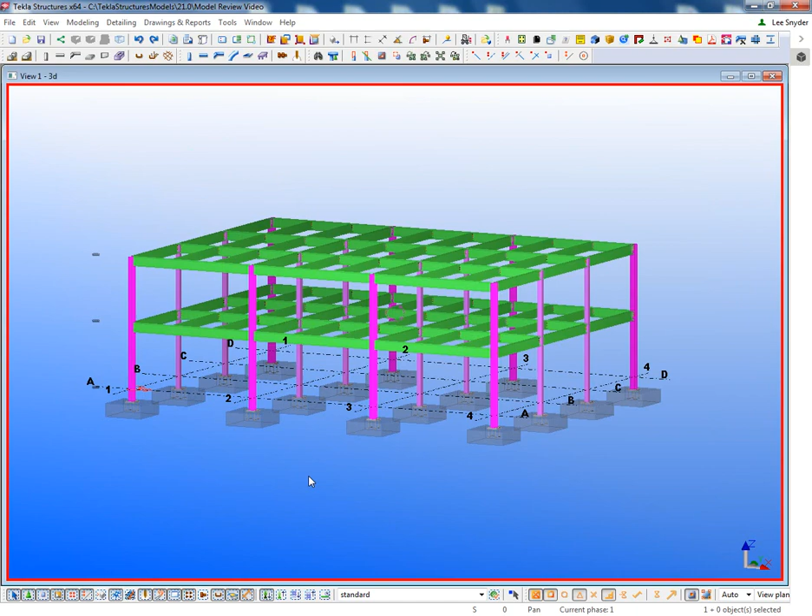I've created my model here, just a basic one here. I've produced the drawings, and I want to send this over to the engineer who's using the project viewer license within Tekla to come in and start reviewing this and status the model. So a couple things that I can do, I'm just working in my normal steel detailing license. I have all of my normal filters and everything like that.

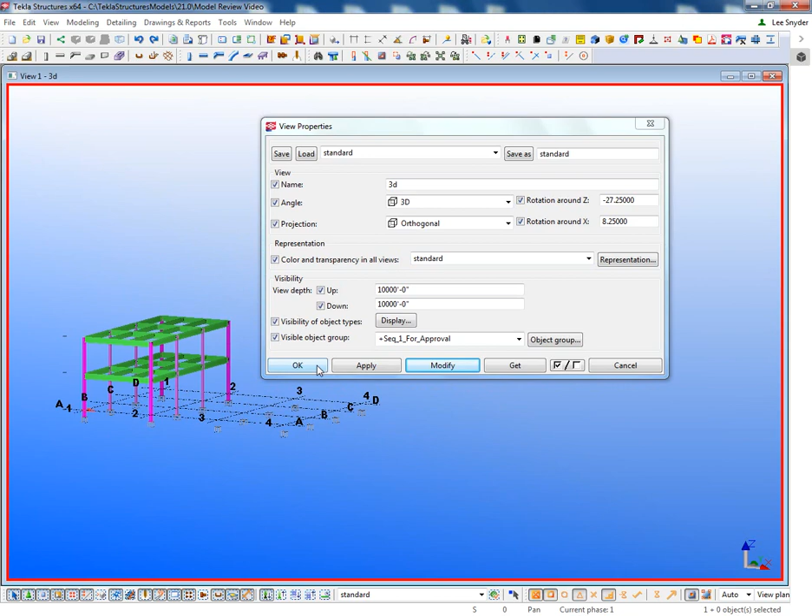And if I want, what I can do is I can come in and just real quickly filter out specific information for the engineer that I want them to review. So I could create like a sequence 1 for approval filter. Just go in here, hit modify, and then this would be the information that they would see when I save the model. So I could just come in here and save the model that particular way, and then to transfer

this, all I need to do is just come in here and just zip up this folder. So my project is called the model review video. I could just come back here, right click on here and then zip this up or send to compressed file, however you want to do that, and then just transfer that over to the engineer so that they have all of my specific settings and everything like that.

They can open it up, begin to do the review, and then to bring all of their status information back into the model, they're just going to send me just a few files that I can import into my current project, which is a workflow that we'll show here in a minute. So here I can just come in and zip this up, give this whatever name that I want, send that over to the engineer. In this case, I'm going to send it over to Dave, and he's going to begin the review for us.

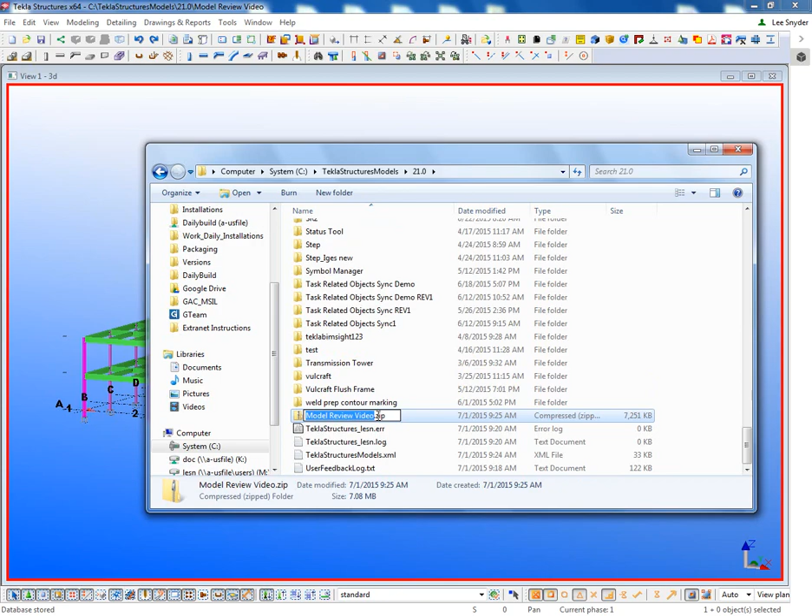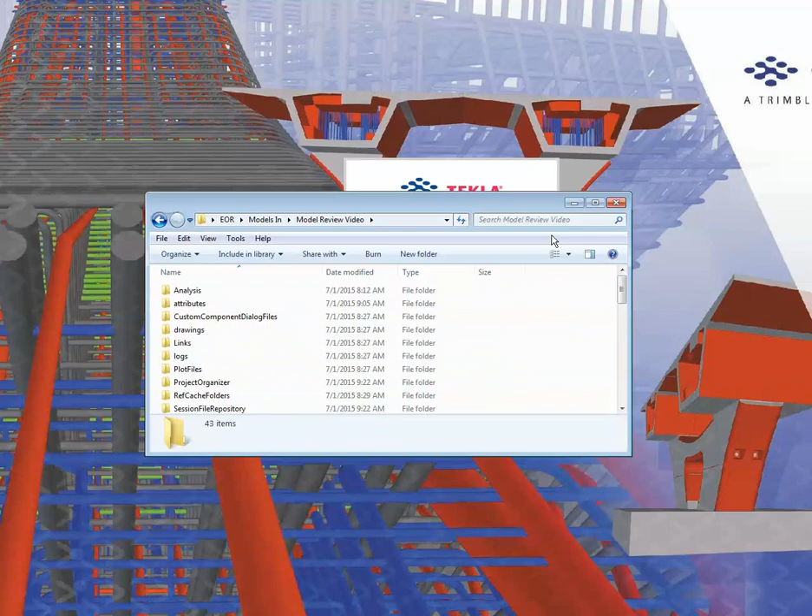Okay, so now that I've gotten Lee's model, whether this is via email, via Dropbox, any kind of cloud server, it's up to you. Good workflow ideas there. So this is the zip file that the fabricator detailer sent over to me. So basically just unzip it just like any other zip file and place it here. So again, if we open up this file, this is the actual Tekla Structures model folder here with all that information as well.

All right, so now I'm going to come in and just open up Tekla version 21, and you'll see here, so the roles now, we've added this reviewer role. This is what Lee was talking about, and this is geared up here to work with our new project viewer configuration as well. So once I have these set up, I'm just going to open up Tekla. Now I'm just going to browse to that model.

But again, now you see, when I open up this model, this is that filter that Lee had set before he sent it over. So again, it's going to make it nice and easy now for the approver team to come through and see exactly what it is that we're looking at on this submittal. All right, now real quick, just some of the things that we did here, just to explain what this reviewer role really is about.

One of the big things that we did here, if we just double click on a part, is you'll notice here that all the user defined attributes in the reviewer role are really stripped out, so that the only thing that you can actually modify now is the review status information. All right. So as you can see in here, it's broken down. We have different submittals that we can status per part.

So each part is set up out of the box to be able to be resubmitted twice, so 3 submittals total. But again, this is great for the reviewer. You can't accidentally override some of the fabrication, shipping, preliminary mark, user-defined attributes that a lot of fabricators and detailers are going to use throughout their workflow process.

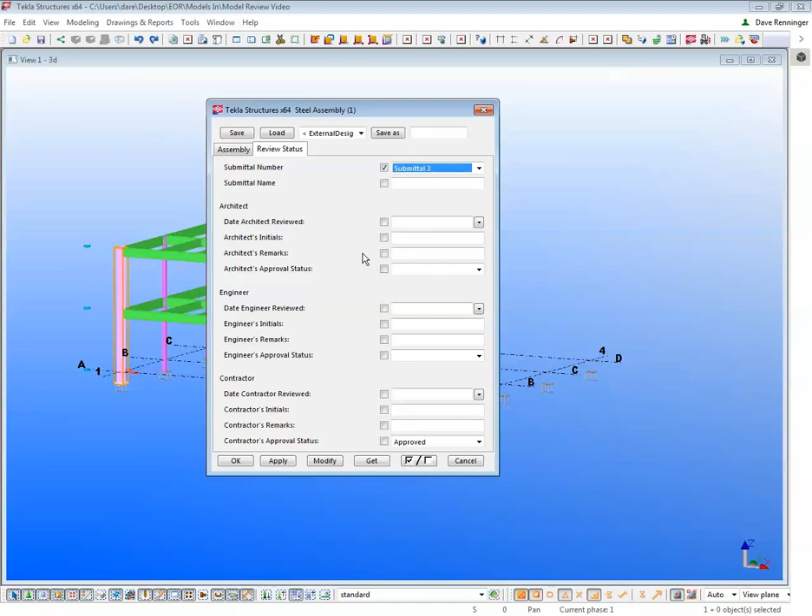So again, all you can actually status now is the review information. Same thing here. So the filters now, we have some select filters that really just apply here to the approval process - what are these statuses by the different review parties, as well as object filters as well.

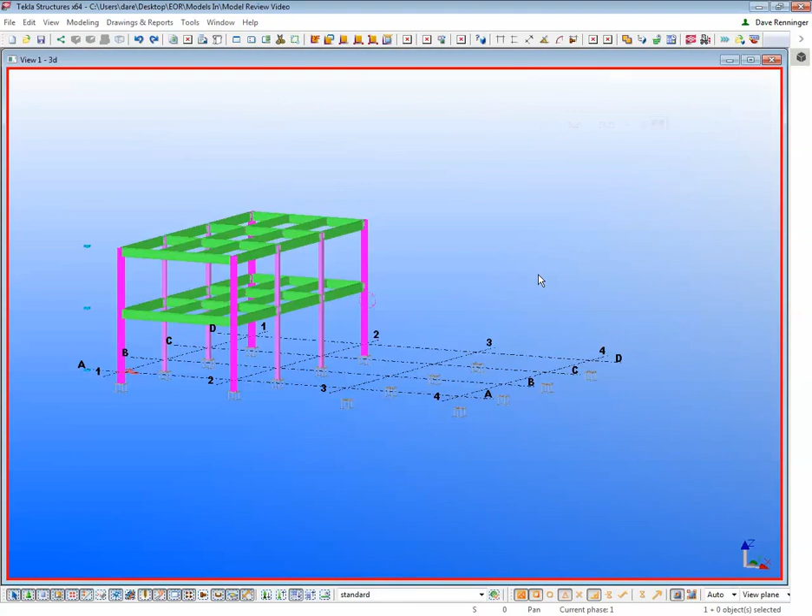All right, so when I come in now to start reviewing, one of the easiest things that we'll start with is probably come down here and enable the Select Assemblies button. This way now I can come in, I can just double click if I want to get any kind of assembly properties, just like we showed before.

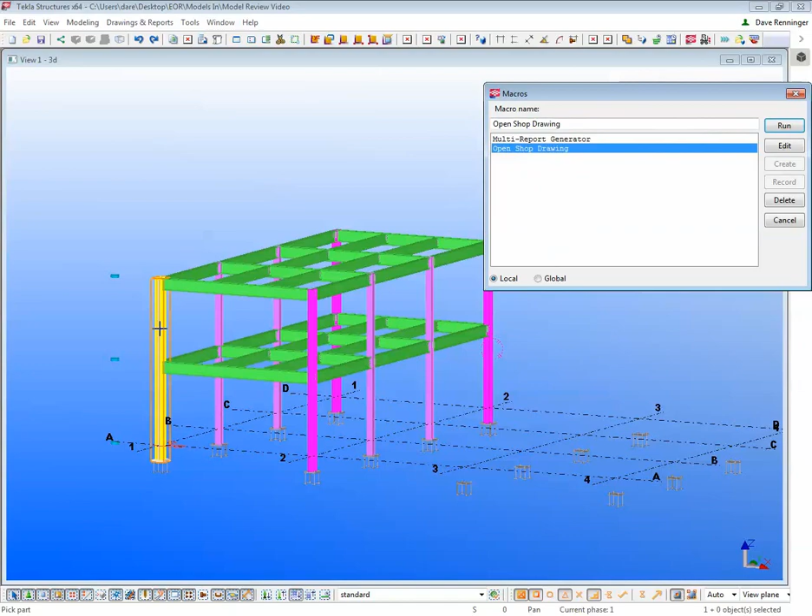What's also good is we can come up here to our macros and use the Open Shop Drawing macro. You'll notice here that the macros list has also been stripped down for this reviewer role. So I'm just going to come in here to my macros, Open Shop Drawing, hit run, and then it's going to ask me to pick an object. So I'll just pick this column assembly here, and now it's going to come through and open up the actual shop drawing.

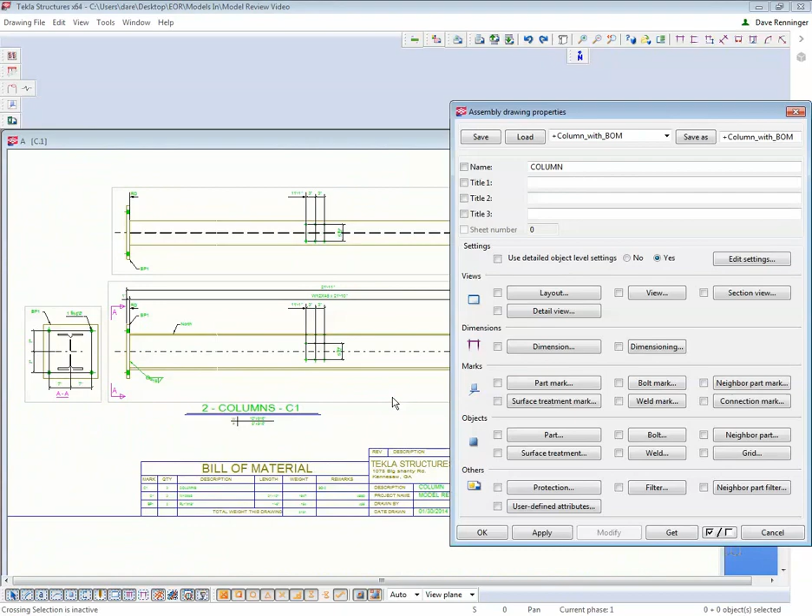So here I can come through and see everything here about the object. I can come down and check out the bill of material for any objects I might have. So now when it comes to actually reviewing this, I can also come through and status this drawing as well. So if I double click on the drawing, if I come in here to the user defined attributes, you'll notice that this drawing as well has this same information.

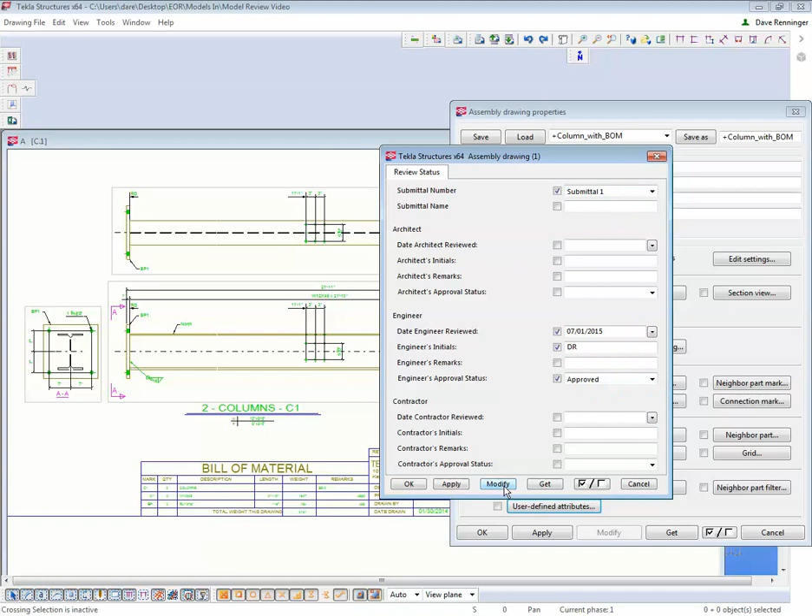So again, we can come in here, submittal 1. I'm playing the role of the architect, the engineer today. I can come in here and just put in my initials, remarks. If there's any kind of remarks, depending on what my approval status is, this one I'm just going to approve it - good enough here. So I can modify this. Now I've actually statused this drawing as well.

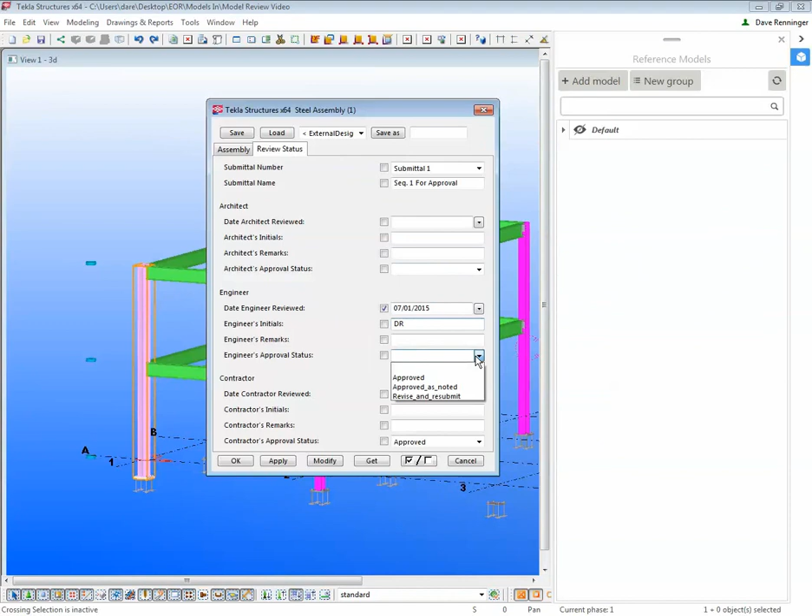Okay, so now again, once I've statused the drawing, I can also come back here into the model. So we'll close out of the drawing, we'll come back in here to C1. So we can status this as well on the actual model level as well. So again, we'll come through here, set up the date, put in my initials here and any kind of comments, approved. Modify here.

All right. So what's good then is what we can do is we can come in here to our object representation rules, and I can colorize the model here by my different statuses. So this is great - I can just come through here and just say, okay, let me colorize by the engineer status, modify now, and this is going to be a great tool to help me as well. So we can see anything that has not been reviewed yet is going to be real transparent, kind of harder to see, but obviously now whatever parts we do status, we're going to get the green, yellow, red colorization based off of whatever statuses we give it here in the model.

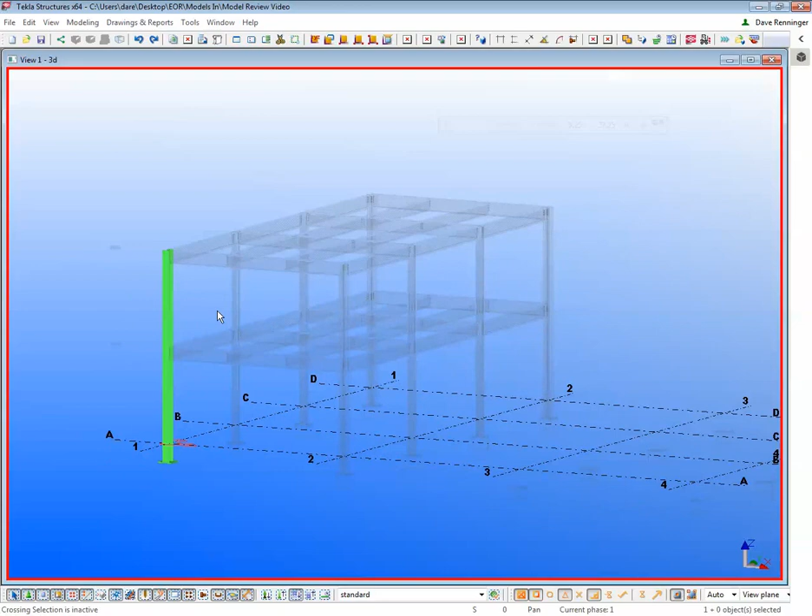Okay, so first assembly approved, easy enough to do. So let's go through now and actually add some comments and some markups to these assemblies. So again, we'll come back up here to our macros, let's open the shop drawings, let's open up a beam drawing here.

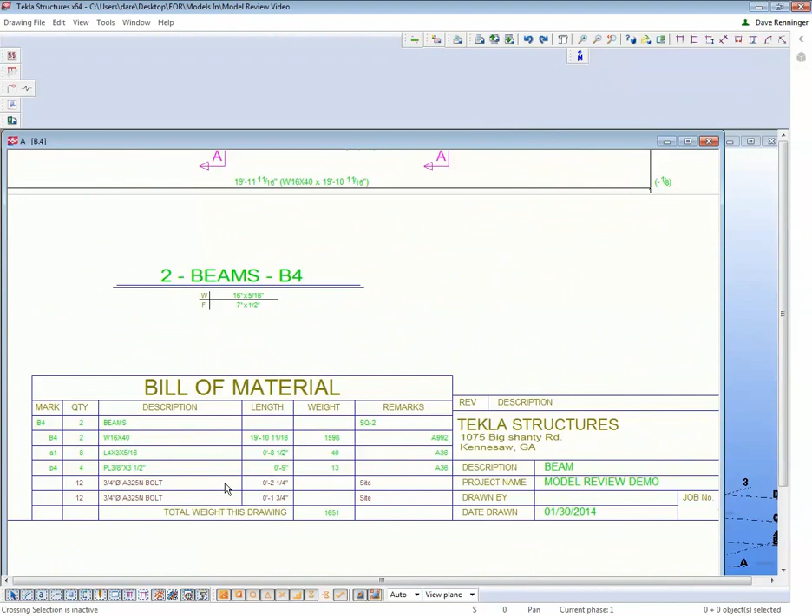All right, so maybe now in this beam drawing something needs to change, whether it's one of the welds or the shear plate. Okay, so this one will be a little bit different. Again, we have all the bill of material information here that we can use to easily dissect to get us started here. So I'm just going to come through here and I'm just going to add a note. Again, we'll go submittal 1, come in here for the date.

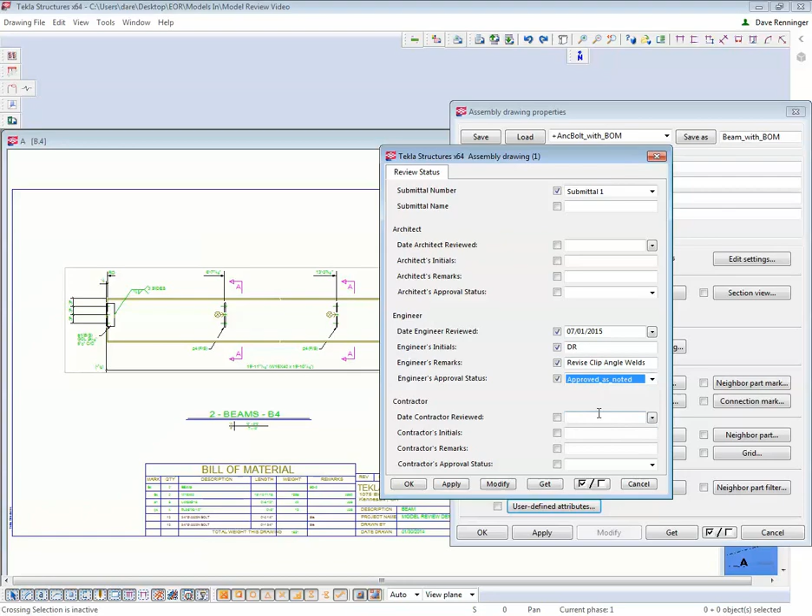I'm just going to say here, revise clip angle welds. So again, I can just add a comment in here, get a little bit of notes, and then this one will say approved as noted. And modify here to status the actual drawing. All right, then we come back out now to the model.

We'll do the same thing here. So again, we're going to come back into our assembly in the model and add this information as well. We can come through here and put the initials in. Now, whether or not we want to put the comments as well, we can put the comments in here, or we could also say see drawings. A lot of different options we have for this. So then again, we'll come in here, approved as noted, and modify.

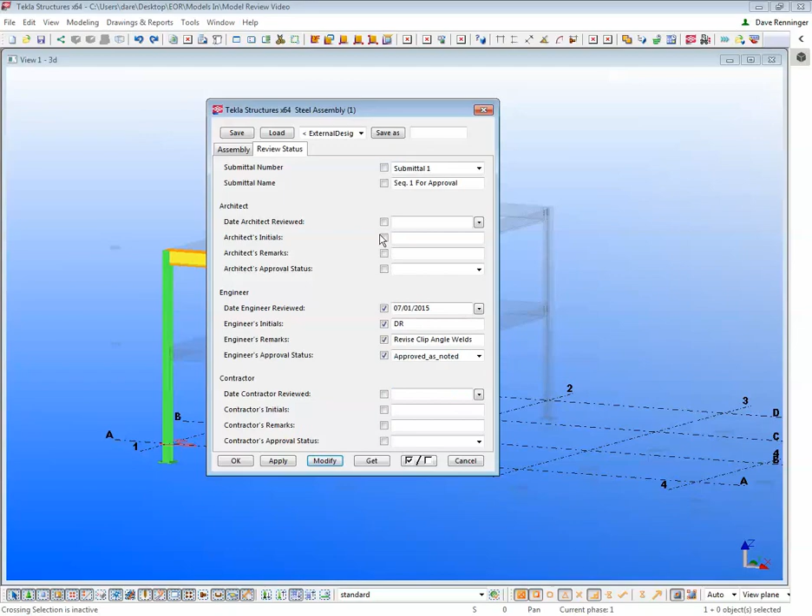So again, now you can see we have one assembly that's approved, shown as green. Another one that's approved as noted is now yellow. So again, we can start to approve this with notes as well.

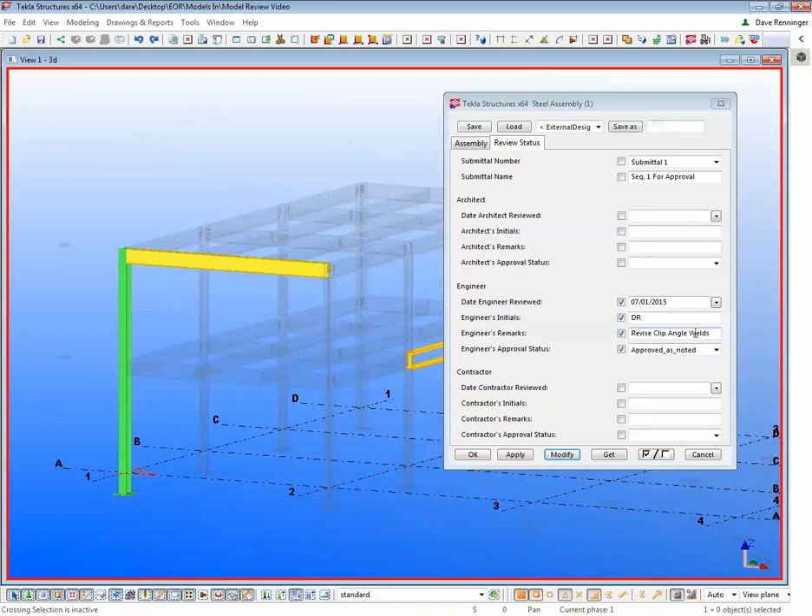Now, one other option we have when it comes to actually adding these comments to parts is that not only can we just apply a note here, revise the clip angle welds, but with this new reviewer role and workflow, we can actually status the individual objects that do need to be revised. This is going to eliminate a lot of the processing time going back to the fabricator and detailer as well. So what I mean by this is we could come in here, let's just pick another member here.

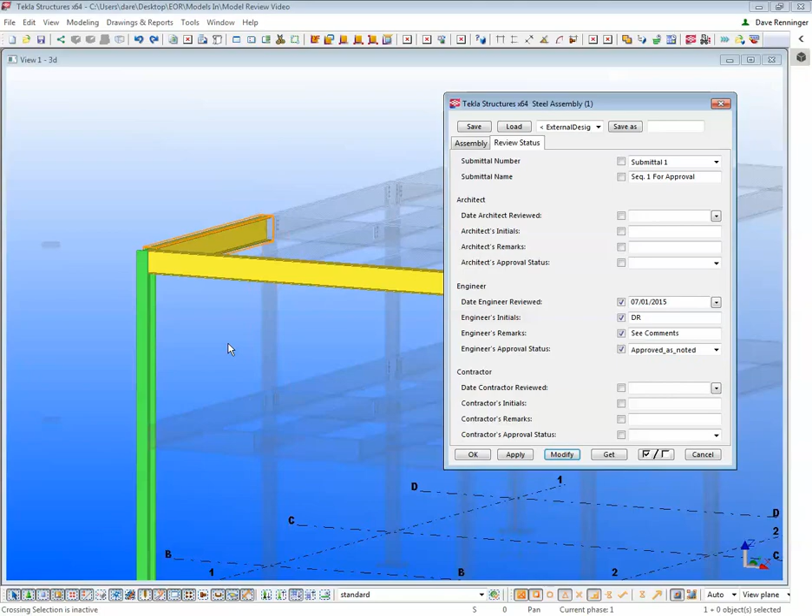If we come into the status inside here, we'll just fill in some basic information, put in the initials, and here we can say, see comments, or just see comments, and again, approved as noted. So say approved as noted, modify. But now what we can do is actually come in and modify some individual objects here.

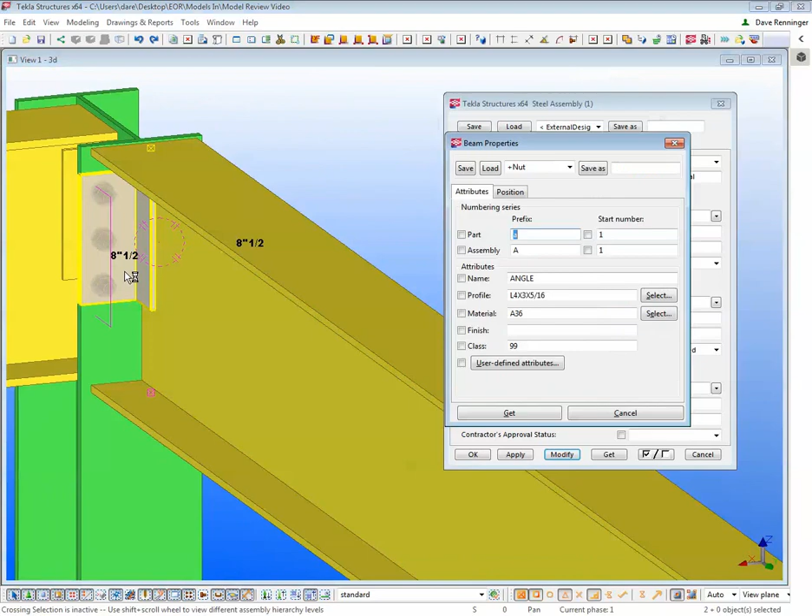So if I rotate my model around a little bit, instead of statusing the assembly, I can come down here and change my option to select objects in assemblies. These parts as well, I have the option to come through here. So if I want to revise these clip angles for any reason, I could just double click and modify these actual individual properties as well.

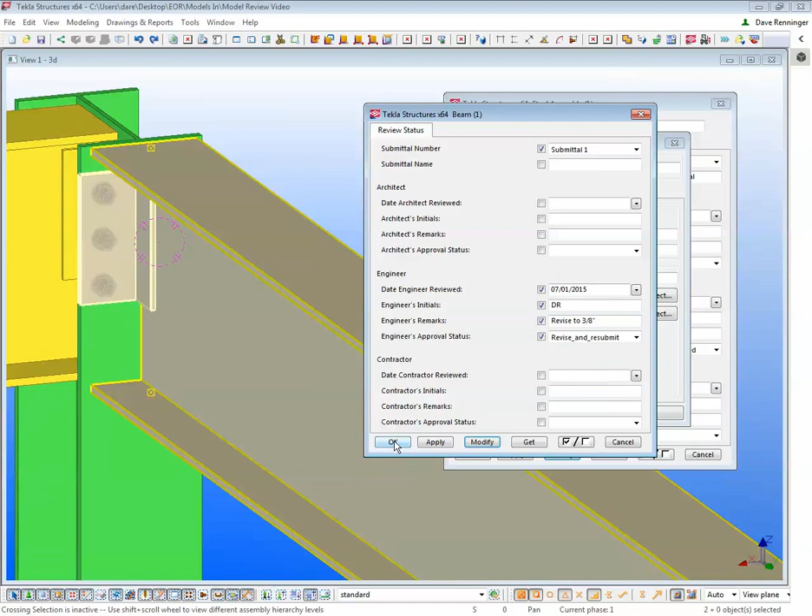So now, instead of just statusing that on the assembly level, I can put my information on here as well. We'll say here, revise to 3/8 inch. And now this one, just to get a little difference, I'm going to say this is to be revised and resubmit, and modify this as well. Now I've made a separate comment on the object level than I have on the assembly level. So easy enough, we can easily get this from the model as well.

This is where we just need to change one of our object representation rules. So you notice here right now, the one that I have set is based off the assembly, but we also have the engineer's approval status on the object level. So now when I modify this, I can see that those clip angles are actually red as well.

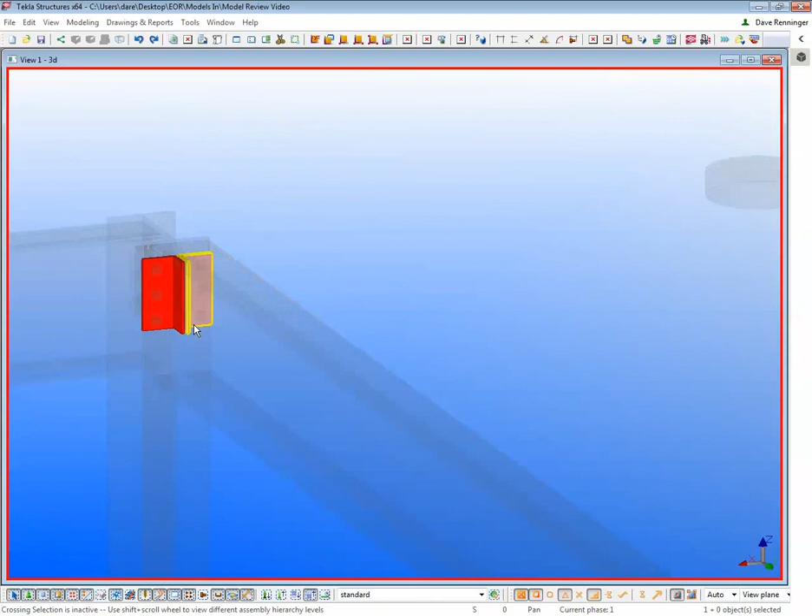So in this case, when you start doing this, it might actually be good to modify the main part of the assembly as approved as noted, and then come in and individually mark up the clip angles as well. So a lot of different options here as far as what level of detail you need to go to get your approval comments into the model.

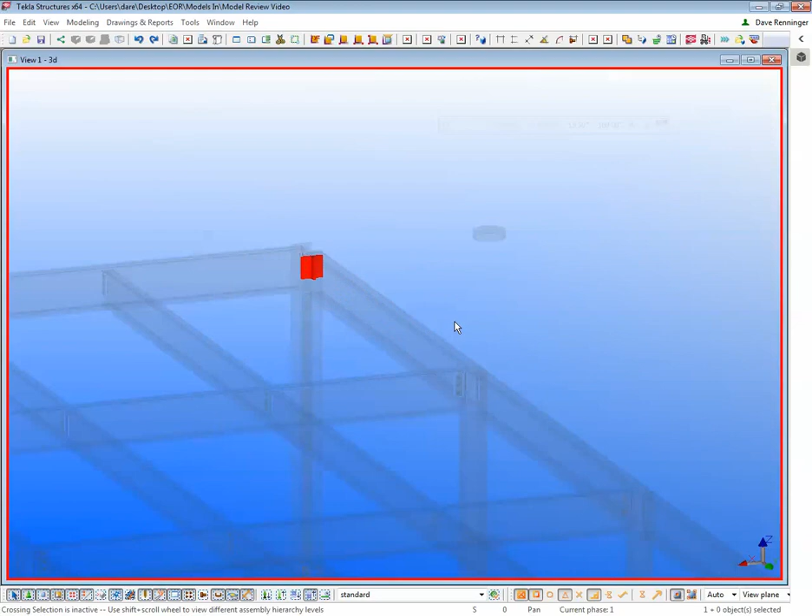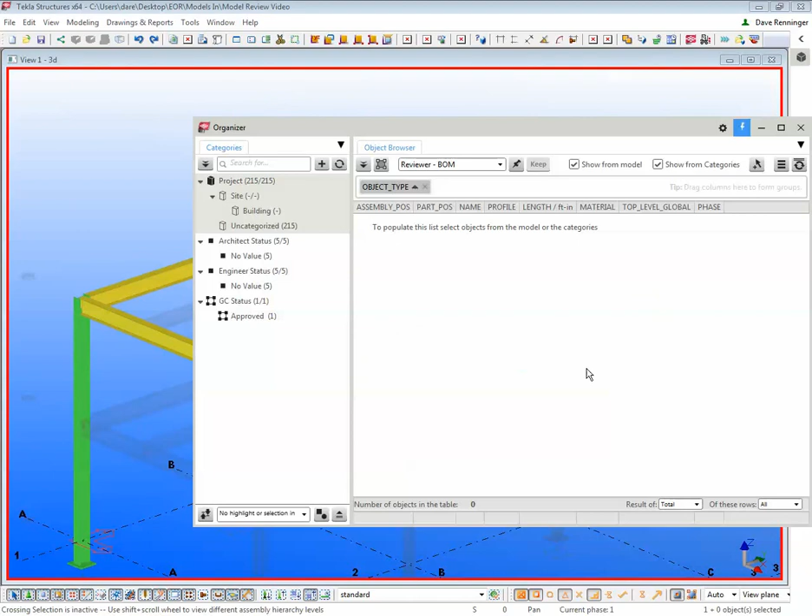All right. So one other way we have to nicely figure out exactly where we're at with the submittals, besides just this colorization, which is a nice quick easy way, we can also use the organizer to digest the approval information. So here I'm just going to load up the organizer, and you'll see we have some nice statuses already created here. I'm just going to synchronize with the model. Now I can come in and search for my engineer status, and you'll notice we already have some as approved, approved as noted, and no value as well.

So I can easily come through here on my engineer status. If I say here my reviewer status role, what I can do is I can easily just start to expand this information here as well.

And if we see the object type with no name to it, that's probably just a component or maybe the assembly. But now when I come through here as well, I can easily see now what the status is, if this has already been approved by the architect or the GC, and I can see their comments really easily on the fly here as well.

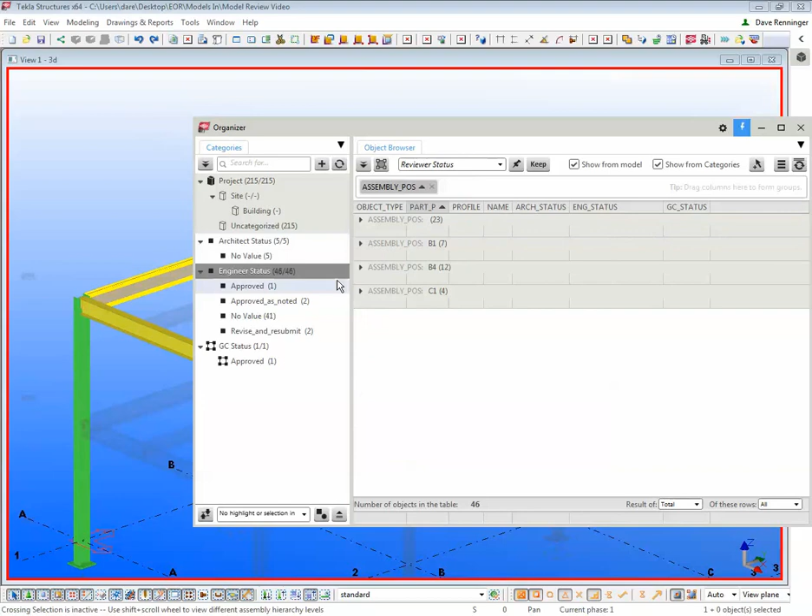So again, just by using some of the nice functionality here inside the organizer, I can also come up here and sort instead of by the object type, maybe sort by the assembly position. This is a great way now, if we come through, we can just expand this view out, and now we get a nice list broken down here by position.

So again, we can see here all the information. We're just sorting different ways we can sort this list as well. So you'll see now we have the name, the profile information here. Again, a real nice, easy way on the fly to come through and see exactly where this is at.

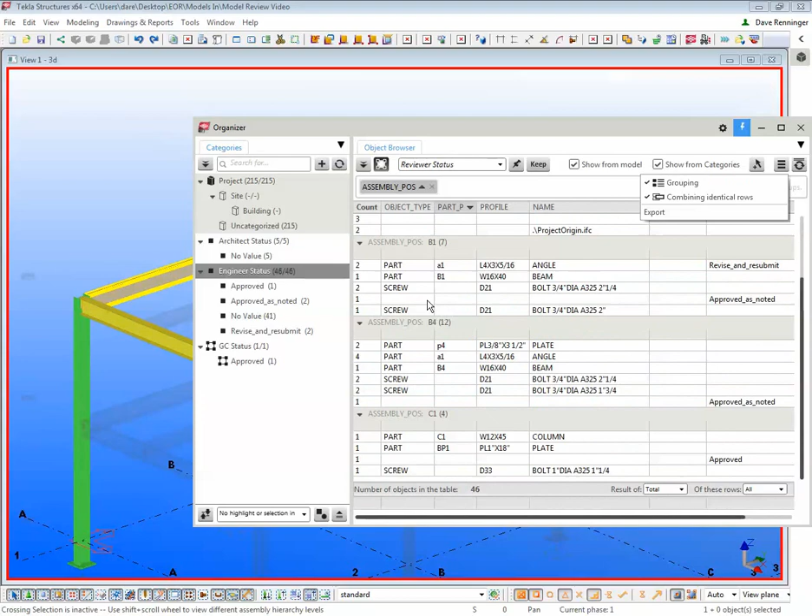So again, a lot of different information, how we can process the information here as well. And we can even combine these identical rows to give it more of a traditional bill of material style here. So again, just a lot of different options and tools to go through and really process all the information.

And again, if we see anything in this list that we need to put an update on, we can simply right click and say select in the model, and now it's going to go through and select those actual individual plates here in the model as well.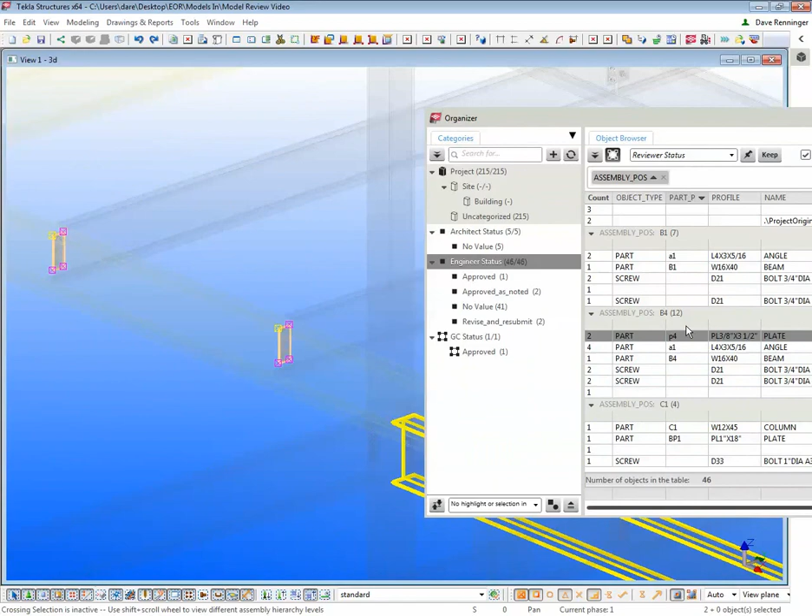So again, if we see something this way, easy enough to come through, find all these p4s, go through, and status them at one shot instead of maybe on 10 or 15 different assemblies.

All right. So now that I've gone through and added all my comments and statuses here in the model, now I need to get the information back to the fabricator and detailer.

Again, being that we have a direct copy of their production model, all of our identifiers, the GUIDs, the globally unique ID numbers, are exactly the same in my model that I'm reviewing as they were in the production model. So this allows us now to just create some basic reports to send back to the fabricator and detailer, where they can go back now and import those in the model.

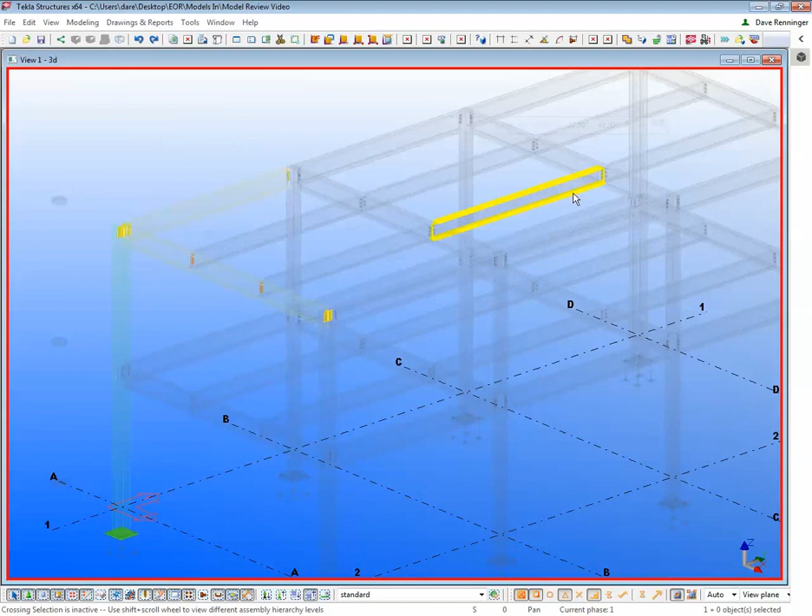All right, so we're going to show next. Again, if we come up here to our show macros, we also have the other macro that's in the reviewer role now, the multi-report generator. All right, so we just run this macro here.

And this is a great macro, just like the name says. We can create multiple reports at one time. And if you see here, we just have some different objects in here, different settings already localized. So whether it's for the architect for all your reports, if we want to break it down by assemblies, drawings, or objects, or also by the review team.

So if I come in here, since I'm playing the engineer now, if I load this, what this is going to do, if I scroll down here, it's going to create these three .csv reports, formatted to open up in Microsoft Excel. So as you can see, this will take all the comments that are on any of the assemblies in the model, the individual objects like those clip angles that I marked up, as well as any statuses on the drawings.

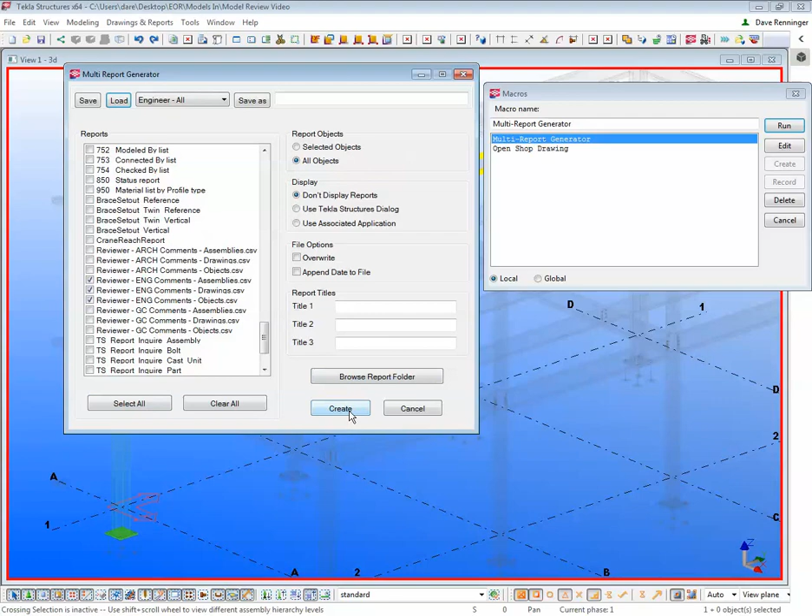Okay, so with these three checked, I can just say, which objects do I want to use? Is it based off of all the objects, or I can do by selected as well. So I'm just going to come through here and say, sure, base this off of all objects and create. Now the good thing is that you can format this based off of all objects because the reports themselves are formatted to only output if there is a status applied to these parts.

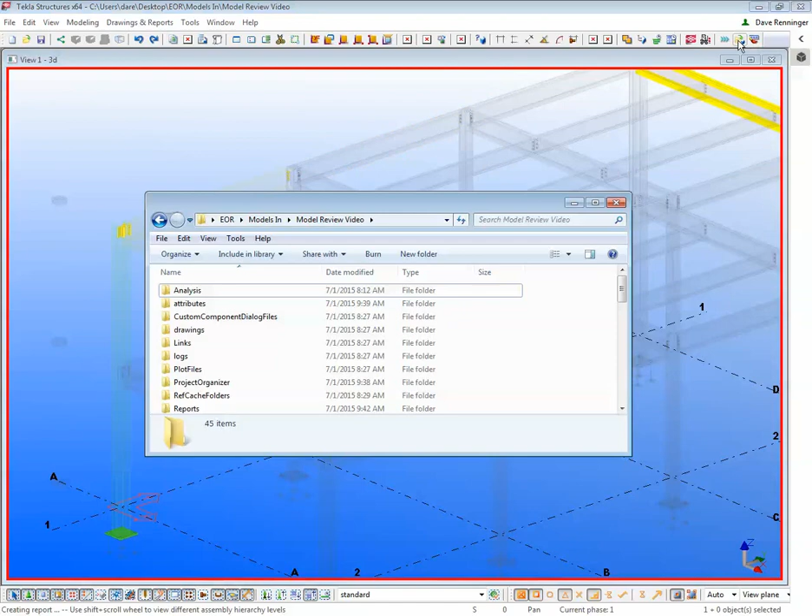So now that I've created these reports, all I have to do is simply come in here and open up the model folder. We'll see in here that in our reports folder, now we have these three reports. Okay, so again, I'm just going to select all these files.

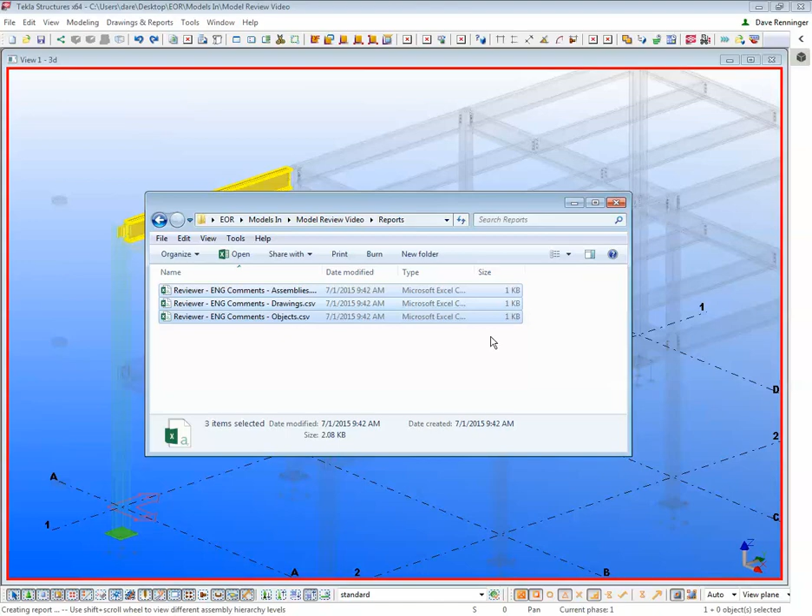Now again, whether I create them in a zip folder, email them back to the detailer, put them up on an FTP site or Dropbox, again, all those communications. But what's nice is, as you can see here, the file size is really going to be minimal what we're returning back as opposed to transferring an entire model both ways.

All right, so I've received the files back from Dave. He just copied them here onto this jump drive. So I'm just going to open this up. Here's these specific files. And then I can just copy them to the model folder or onto the desktop. Doesn't really matter. I'll just paste them here on my desktop.

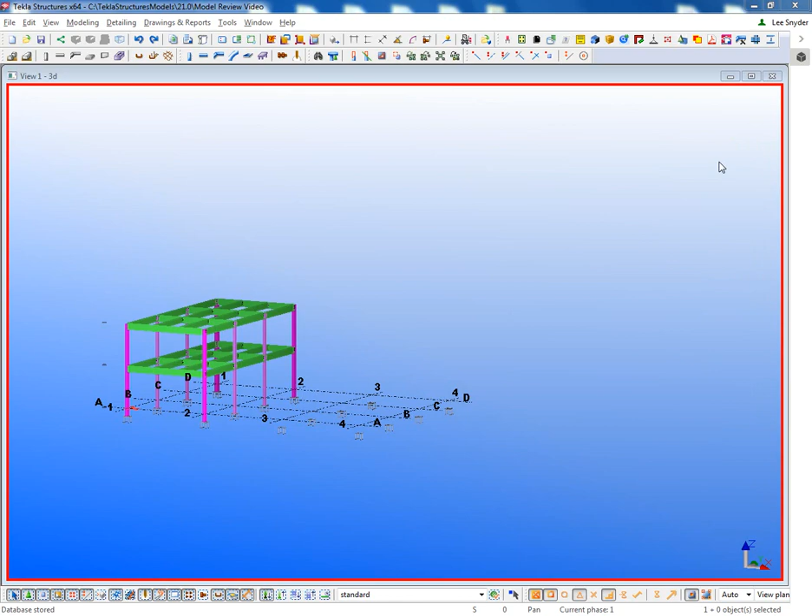And then what I can do with those is just come up here to File, Import, and then I'm going to come down to Attributes. I'm going to attribute import these files directly into the model. So here I'll just come here. First I'll just bring in the comments for the assemblies. Hit OK. I can set up any specific settings that I may want, but I'll just apply, hit create.

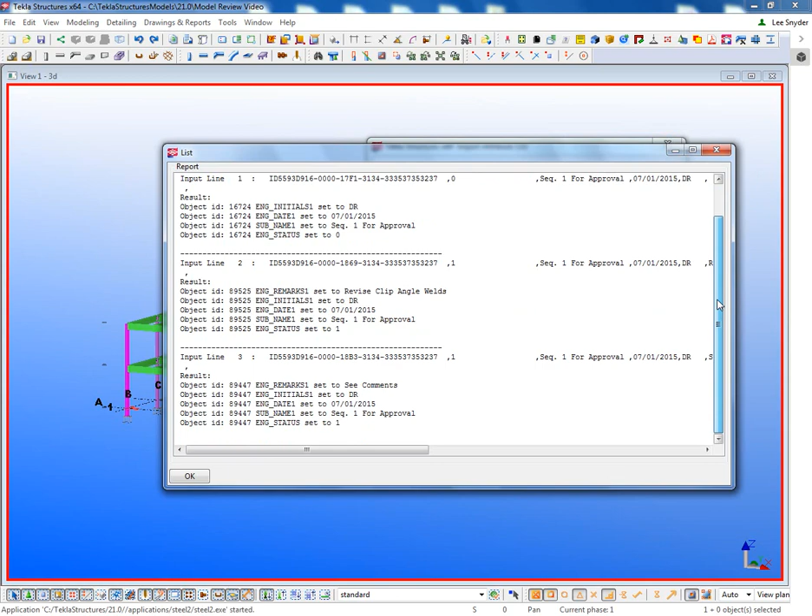It's going to go through, bring those in, and then it'll show me a report here if I want of the status that it brought in. So I'll just do that two more times. So I got the assemblies. Let's go ahead and bring in for the drawings. Got those there, and then one more for the individual objects, those angles that Dave statused.

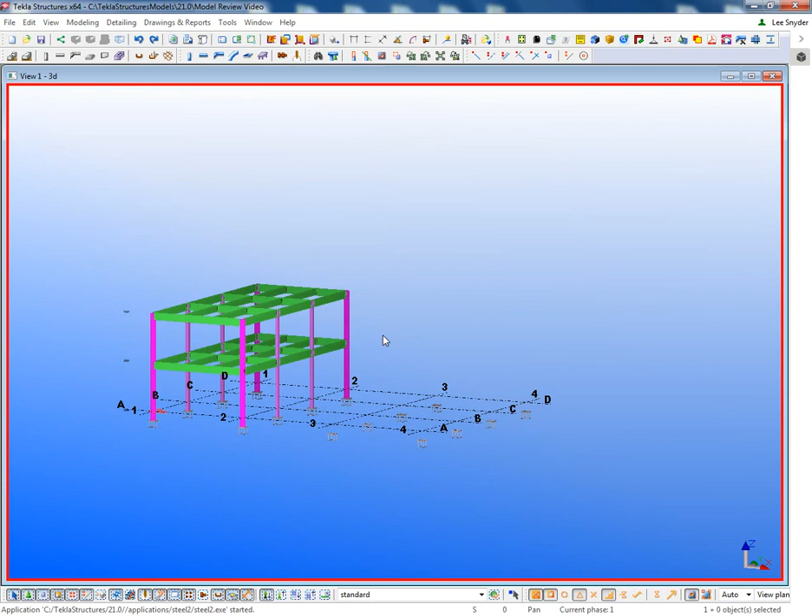All right. So now that I have those, what we've done is we've created, along with this reviewer role, a new steel detailing INI file that will bring in all of the reviewer role information. What I mean by that is that all these colorizations, object representations and filters that Dave's able to use, I can use in conjunction with all of the other things that I have here within my model.

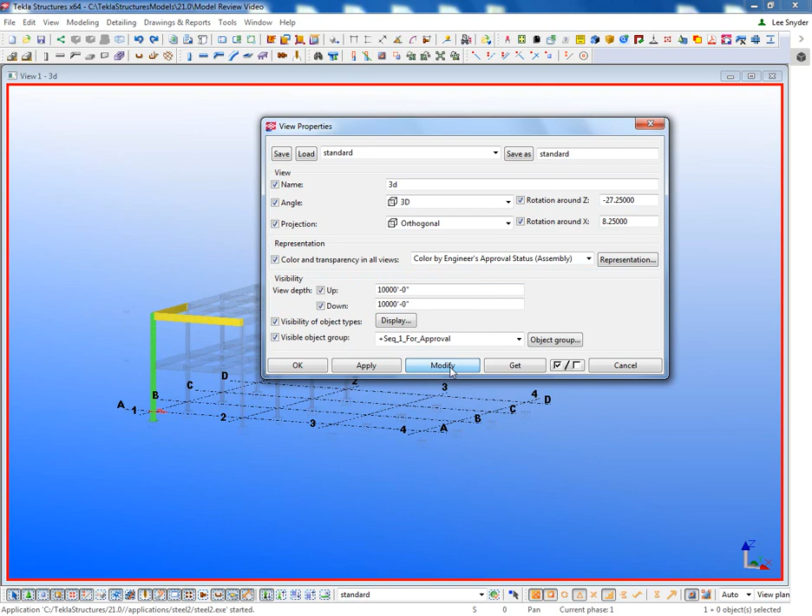So if I wanted to come in and colorize my model now by the assembly status for the engineer, now I can see the exact same thing that Dave was looking at. If I come in and inquire, then I can view all of the user-defined attributes that have been statused there. The other thing that I can do as well is come down here to the object level, and let's go ahead and modify those guys.

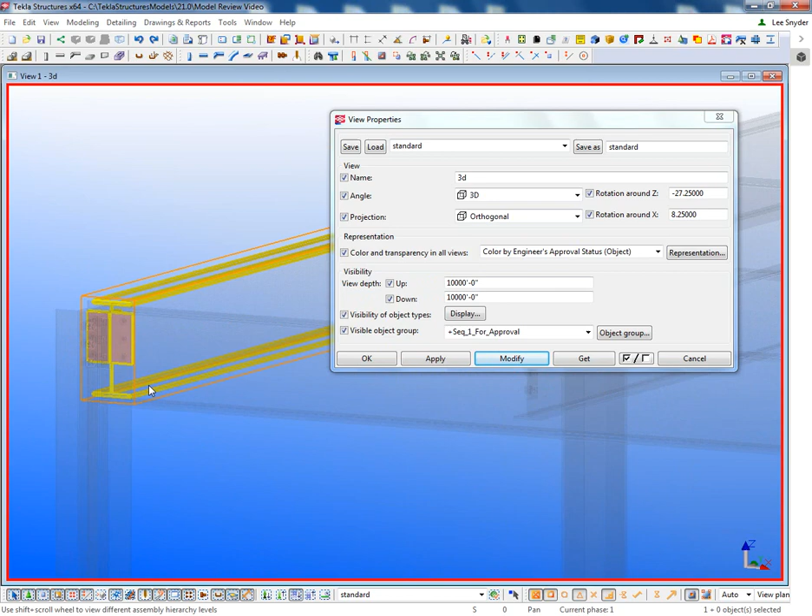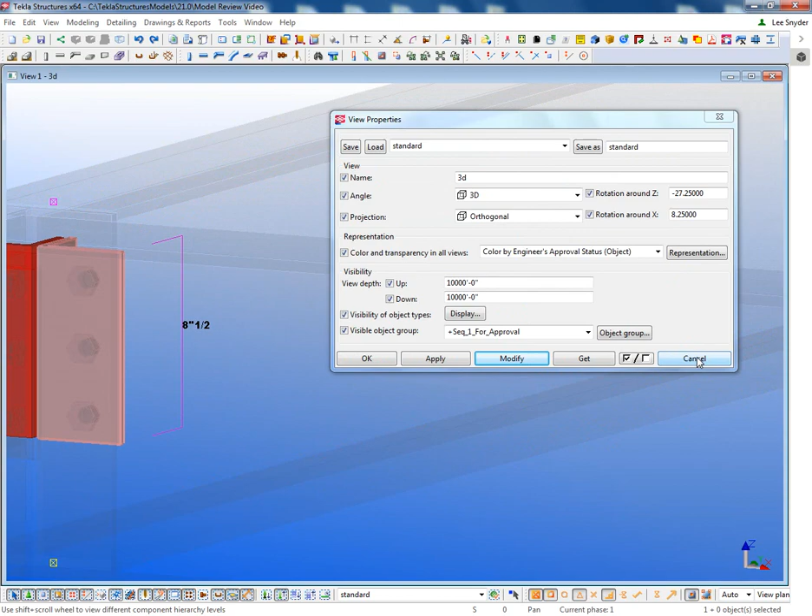And then there are the clip angles, same type of thing here, that if I want to come in and inquire on these or just open up the user-defined attribute dialog box, those will be available since we merged those in here. So here's all that information, just like Dave was able to see on his side, has been merged in on my side. And then I can come in, make any model changes that I may need to, and then package up the model, send it back if I need.

One thing that we can also do is come in and view the drawings. So if I have all of the drawings in here, I can just filter this one out and open up the user-defined attributes, and then here's the status there. So everything comes back, whether it's on the drawing level, object level, or the assembly level, for me to be able to view, see the comments, and then go through and make any changes as necessary, and then just continue on this process. Once I'm ready, I can package up the model and send it back.

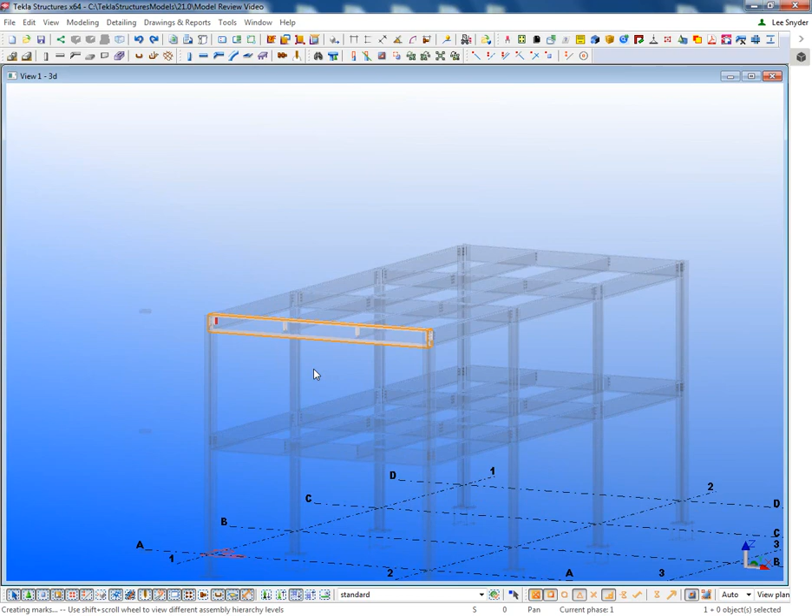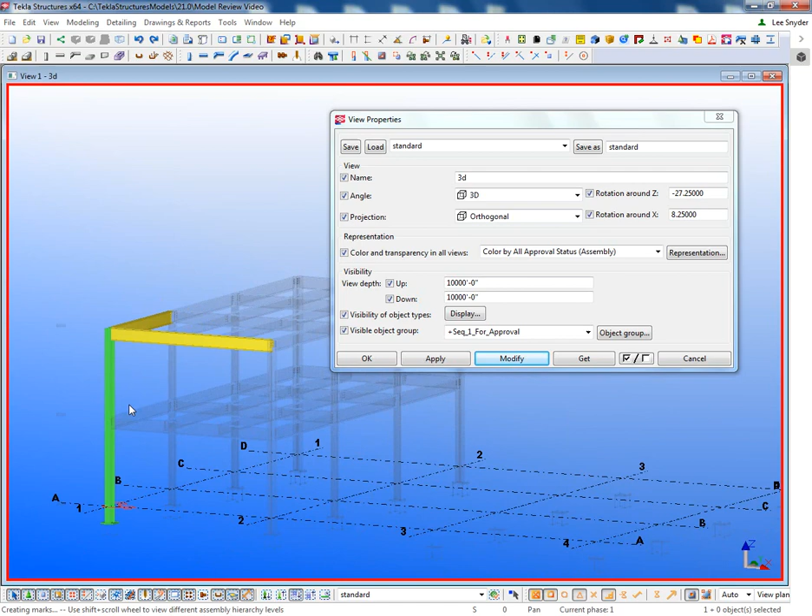As the detailer fabricator, we just showed the example of bringing in the engineering status, but I can bring in the status from the architect and from the general contractor, and then use their associated filters to view their status, or view the entire status, which in this case we just have the engineering. So there's just a quick overview of the reviewer role that's been created that you can use with the Project Viewer license, which is the most basic license that we have.